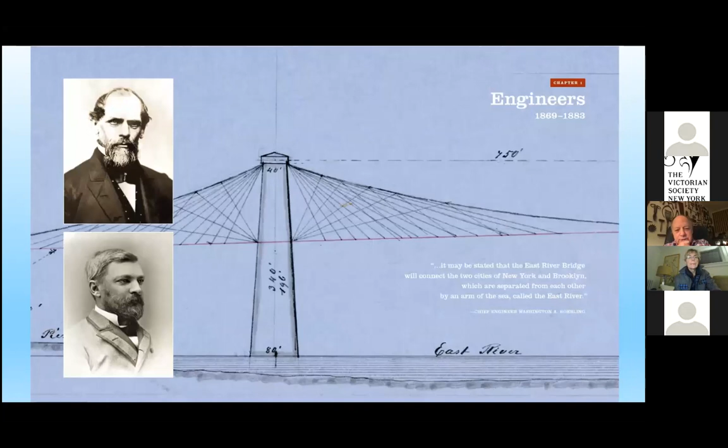So we will now track those chapters. Here we are with the engineers, the two chief engineers, John Roebling again and Washington Roebling, pictured here in an illustration of the time.

John A. Roebling was the chief engineer. He was the most successful and best known of the suspension bridge builders in America in the 19th century. He had trained in Germany as an engineer, and had studied philosophy with Hegel, who by one account described John Roebling as his favorite student.

But John Roebling decided after his family had lived in Mulhausen, Saxony, Germany for generations, that Germany was no longer for him, that America was the land of opportunity. So he fled Germany with a group of others and declared himself a Pennsylvania farmer. He and his brother purchased thousands of acres in Western Pennsylvania, not far from Pittsburgh. He farmed for about a year, then decided it was not sufficiently stimulating for him and abandoned farming—he had never farmed before arriving in Pennsylvania—and became a surveyor, then wrote a publication from Europe about wire rope and became a wire rope manufacturer in this tiny little town in Western Pennsylvania.

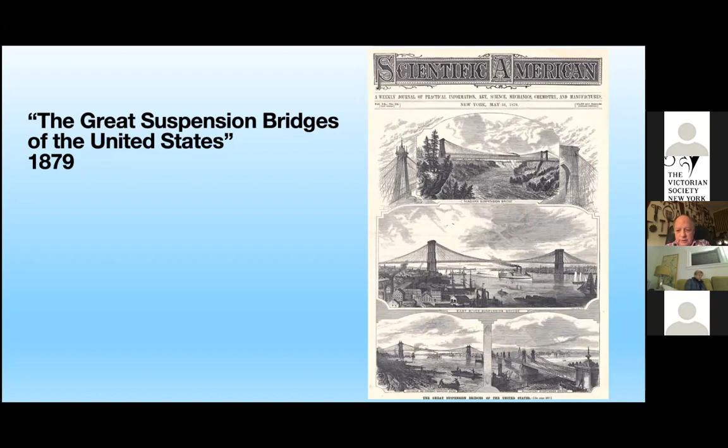So here we are, the Niagara Bridge, one of the first great constructions of the Roeblings. Both John Roebling designed this and Washington Roebling worked on it. Constructed between 1851 and 1855, across the Niagara Gorge, which one can easily imagine how difficult it was otherwise to get across reliably. You see that this was, in fact, a 2-tiered bridge.

So there are 4 cables here, 1, 2, 3, 4, holding up this bridge on stone piers. You see the truss element, which was a key Roebling quality, giving stiffness to the bridge so that it would not start to vibrate with wind or with any kind of rhythmic movement.

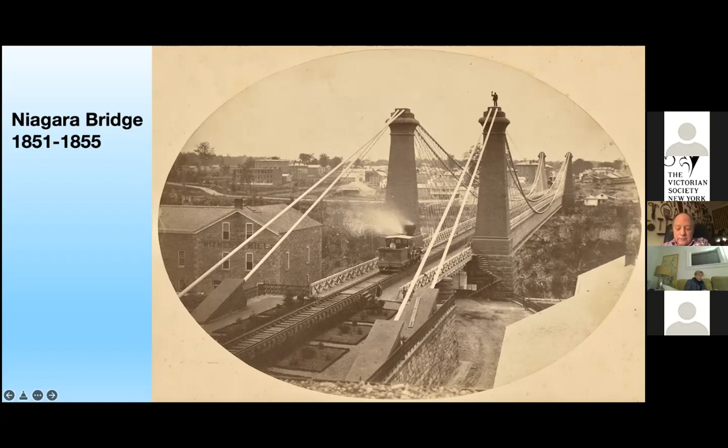Then there was a second tier, a second level underneath for carriages. So the top tier was for steam locomotives to pull railways across.

And so here we're getting close to our 3D images. This is a stereoscopic view, which were tremendously popular during the Victorian era, starting in the late 1850s.

Running into about 1920 was the period for these views. They were slightly different side-by-side photographs on a heavy paper card that was about 3.5 inches by about 7 inches.

The Victorians could travel the world with these stereoscopic views, seen with a special dedicated viewer with two lenses: Paris in 3D, or Egypt in 3D, or London, just going around the world. This was very much the home entertainment center for the Victorian parlor.

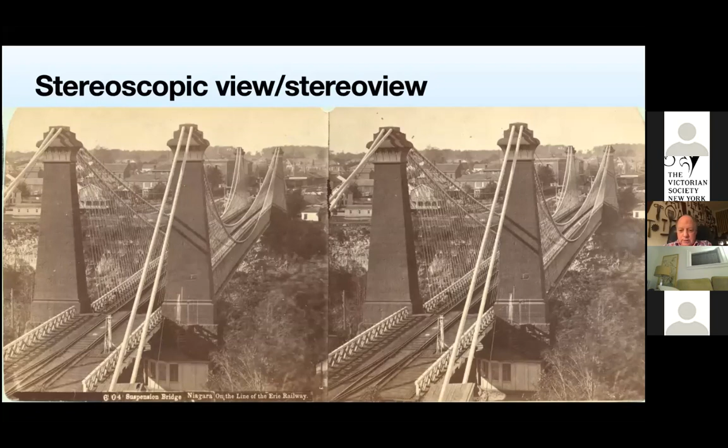This shows you the side-by-side images. And then here is an anaglyph, which is a scan that, with software available for free on the internet, is turned into an image which can be viewed with 3D glasses.

Now if you do have the 3D glasses, put them on with the red lens on the left over your left eye and the cyan lens over your right. Then adjust, get about 16 to 18 inches away, and move your head a little bit, your eyes, and you should be able to see in 3D the Niagara Bridge.

We have about 15 images in 3D that we will go through, most of which are of the Brooklyn Bridge. I'd like to thank Jeremy for conscientiously getting these glasses out to all of you.

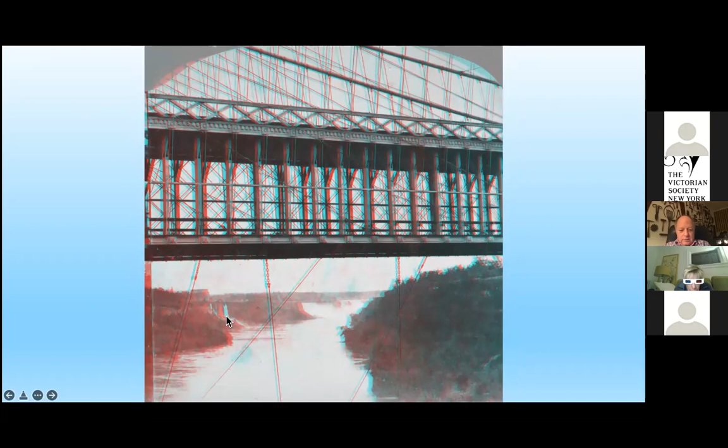Here is another 3D view, so glasses on for that: the bridge looking towards the Falls of Niagara in the distance. You see the American Falls here and the Canadian Falls here, and you get a good view of the carriage crossing underneath that top area where the railway went across. This was actually the first bridge in the world that allowed railways to go across like this.

So here we are, a subsequent bridge by the Roeblings: the Allegheny Bridge in Pittsburgh, 1857 to 1859. And then the Cincinnati-Covington Bridge, 1856 to 1866, with construction shut down during the Civil War.

But for many people, this is kind of a mini view of the Brooklyn Bridge, and you see some of the fundamental aspects that would appear later in the Brooklyn Bridge. This is a substantially reduced version of the Brooklyn Bridge.

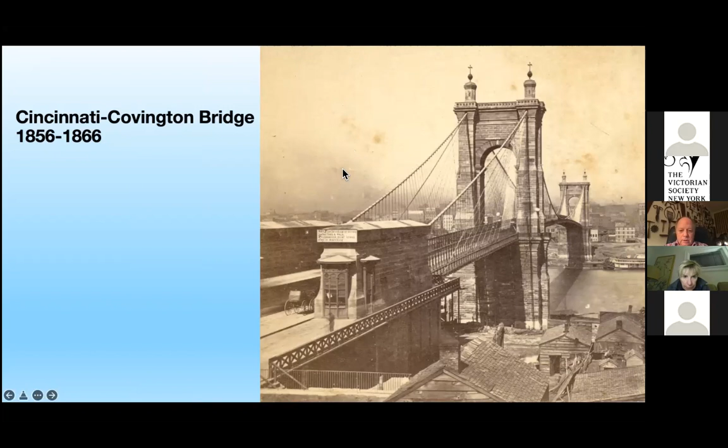Currier and Ives print of the Brooklyn Bridge, which gives us a good opportunity to describe exactly what a suspension bridge is. First, you need to keep the ship traffic on the East River going, particularly because the Brooklyn Navy Yard is to the north of the bridge, and ships from the United States Navy had to get underneath. So the towers serve that function by lifting up the deck of the bridge to allow passage underneath.

Then you have the cables. In the circumstance of the Brooklyn Bridge, four cables, one, two, three, four, which support the deck and the weight of carriages, or cars, or bicycles, depending on the era that you are in.

And so from the cables hang these vertical suspenders, up and down, and then they are attached to the steel beams of the Brooklyn Bridge.

The Brooklyn Bridge was the first bridge in America, or well, the first bridge to use steel as opposed to iron in its construction. John Roebling very much believed that steel was the material of the future, and in fact we know that steel cage buildings made possible Manhattan rising late in the 19th and early in the 20th century.

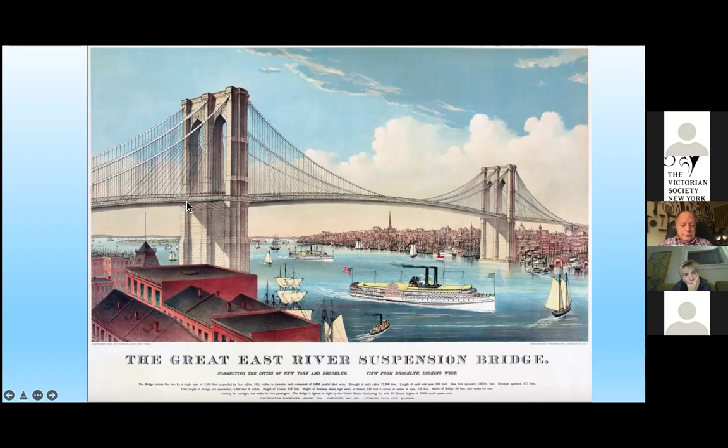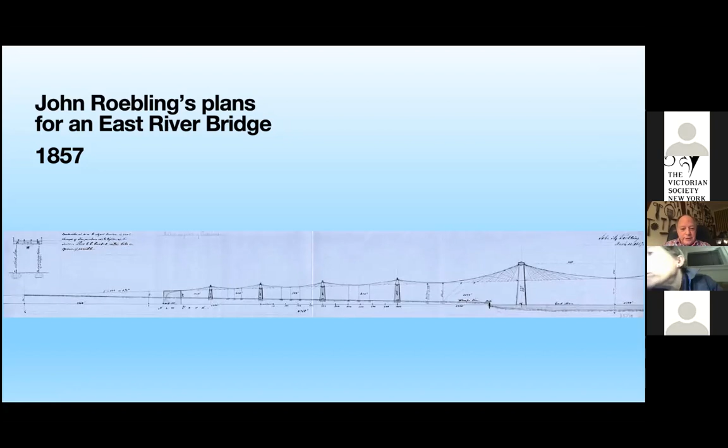As early as 1857, John Roebling had submitted plans. He and his son had been stuck on one of those ferries amid the ice floes in the East River. John Roebling was not a patient man, and he very much wanted to get something across the East River to allow for crossing. This was a plan that was to go up around Roosevelt Island, up around where the 59th Street Bridge stands today.

Here we are: this is the ferry slip on the Brooklyn side at Fulton Street. You see the mansard-roofed terminal that actually opened during the construction of the Brooklyn Bridge. At the far left you see the tower on the Brooklyn side, and then you see these ferry slips. This is in fact where John Roebling, the father, was mortally wounded, as in June of 1869, he and his son were down there surveying for the center line of the bridge.

So this is the Hamilton Avenue ferry I photographed, which shows you what these pilings looked like at the side of the ferry slips.

John Roebling was up in this area of the Fulton Ferry landing, and a ferry was coming in. He stood to the side, or at least he thought he stood far enough to the side, but his leg was crushed between the ferry and the wooden pilings, and he died a very painful death of lockjaw just several weeks later.

He believed in hydrotherapy and treated his wound with water, which did not work. So the ferry, ironically, killed off the man who had planned to build this bridge that would eventually kill off the ferries. This is his grave in Trenton, New Jersey.

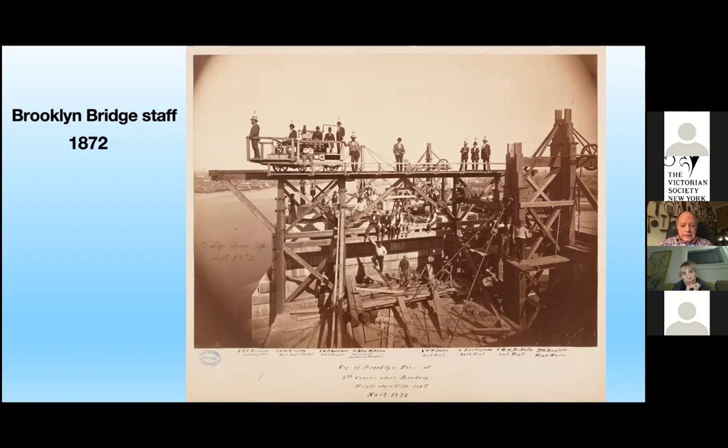Here's a wonderful photograph of the staff in 1872 on the Brooklyn Tower. What's great about this is that it's all keyed. It's difficult when you have a photograph and no one is identified, but here all of these individuals are identified.

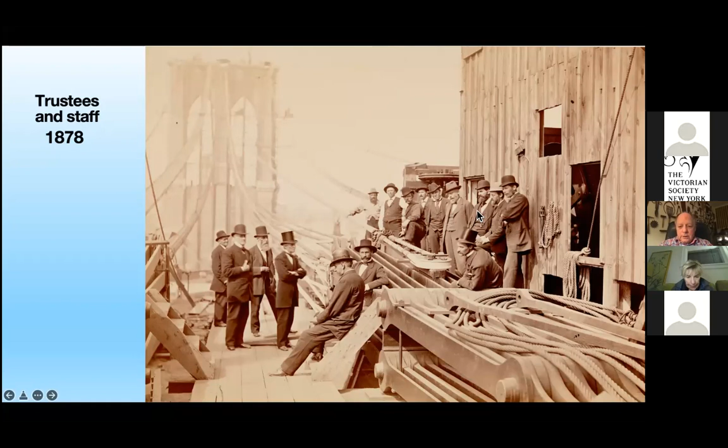With the draftsmen and supervisors here, some of the assistant engineers here also, and two of the assistant engineers in the foreground, both of whom are interred at Greenwood Cemetery, where I'm the historian. This is William Paine at the left here, and this is George McNulty at the right.

Six assistant engineers, one of whom was hired on a 30-day contract early in the construction, all of whom worked the entire 14 years and stayed until the bridge opened. Really quite remarkable.

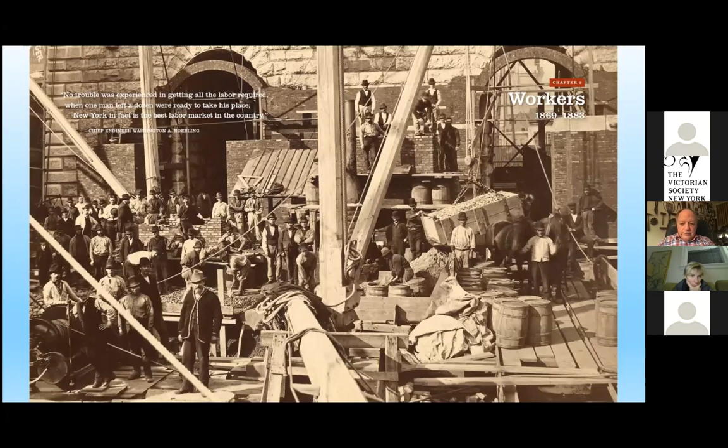So the workers—here is a really remarkable photograph of the workers gathered for this photographer, and a detail of that. You can actually see the faces of the men who built the bridge. Several thousand worked on the bridge.

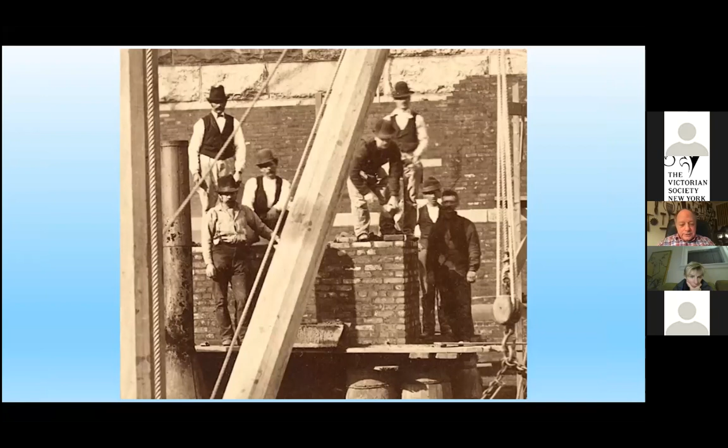At any given time in a week, 100, particularly when the caissons were being used, were quitting out of about 300 who were working. So there was a tremendous turnover, but never a shortage of men who wanted to work on the bridge—primarily German, Italian, Irish immigrants, also veterans of the Civil War just 4 years after the war had ended, and also a number of sailors who felt comfortable at heights.

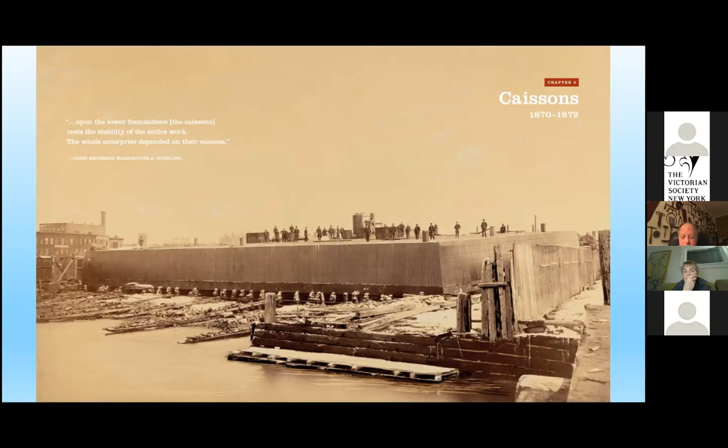This thing was massive, as you can see from the size of the men atop it. It was 168 feet long by 102 feet wide. David McCullough calculated you could fit 4 tennis courts on top of these caissons. There were 2 caissons, one for the foundation of the Brooklyn Tower and one for the New York Tower.

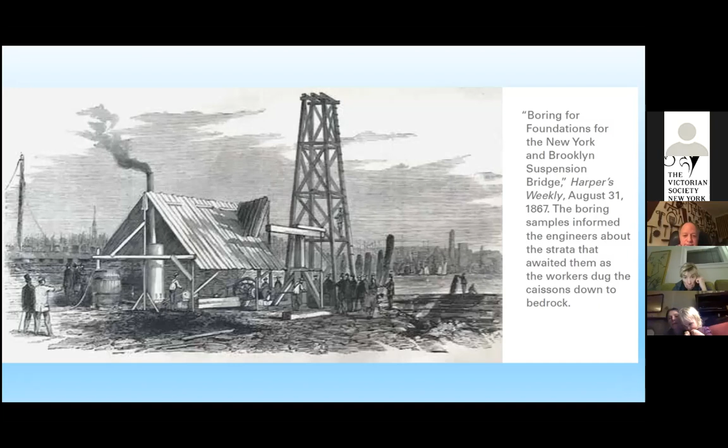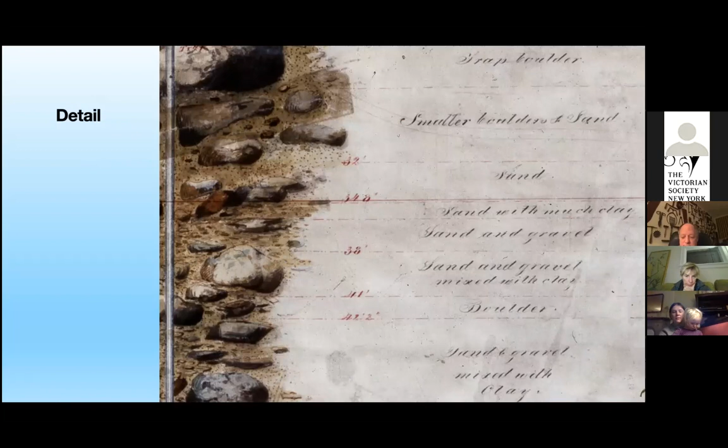Of course, if you were going to dig these huge boxes into the ground - and they became the largest things ever dug into the ground in the history of humankind up until then - you needed to get some idea of what you were going to encounter. So here we are in 1867, taking borings to figure out what stratification they would encounter. Here's a drawing from the municipal archives, and here is a detail showing the boring area at left, and some of what they were going to encounter as they went down: a layer of sand with much clay, sand and gravel, et cetera.

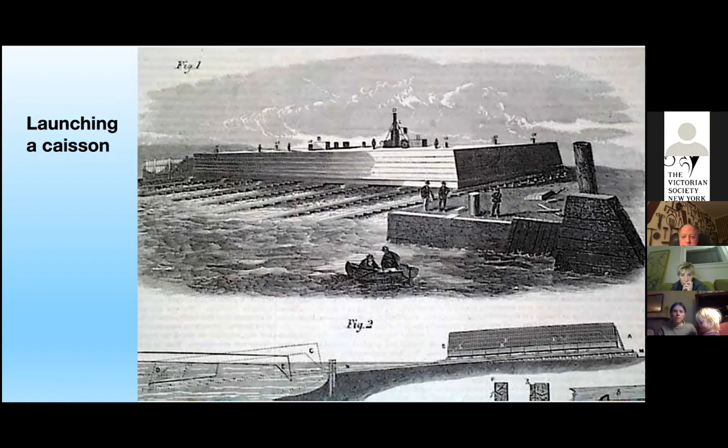Other engineers told Washington Roebling that this thing was going to go right to the bottom of the East River as soon as it was launched. You can see it here as it would be proceeding down, and then it would level itself - it went exactly as he had planned.

This is a man who built some of the largest ships on the sea, and his proudest accomplishment was one of the caissons of the Brooklyn Bridge.

So this is a caisson, how it operated. This is a woodcut drawing that would have been in one of the illustrated newspapers - I think this one was in Harper's Weekly. Of course, there was Frank Leslie and others.

What you're seeing here is the digging space where the men worked, removing boulders and sand and clay and mud. There were 2 scoops, and these scoops came down through what was essentially a barometer that was holding the compressed air inside the chamber. These scoops could come down through the water, scoop up the debris from a pool down below, and pull it up and out of the caisson.

And then these are the entryways for the men. There was an airlock up in here, and then a supply shaft, and also an air shaft for the compressed air.

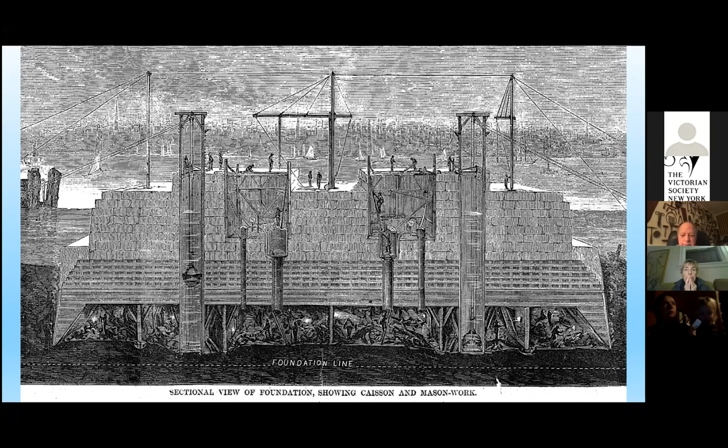So you see how they're piling - here's the wood of the caisson, and here are the stones that would make up the tower. They are piling these blocks one at a time, helping to stabilize the caisson, and at the same time hopefully driving it down a bit into the ground. They were going to dig on the Brooklyn side about 50 feet, and on the New York side about 80 or 90 feet down with these huge wooden boxes, which are still there, I might add.

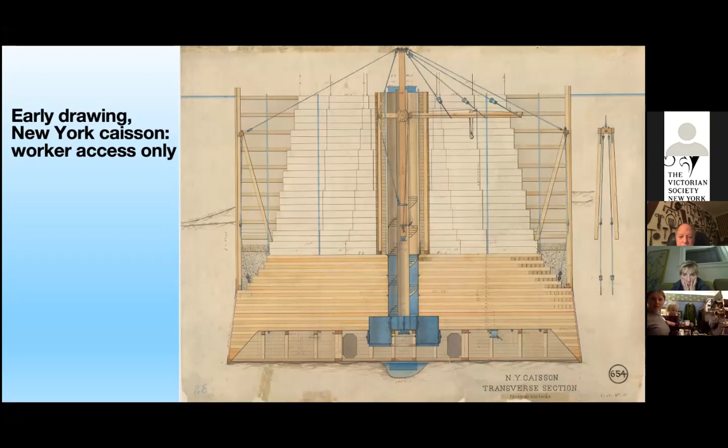So here's an early drawing, by John Roebling I believe, of what this was going to look like - again with the caisson below, the wood of the caisson, and then the stone of the tower rising up above.

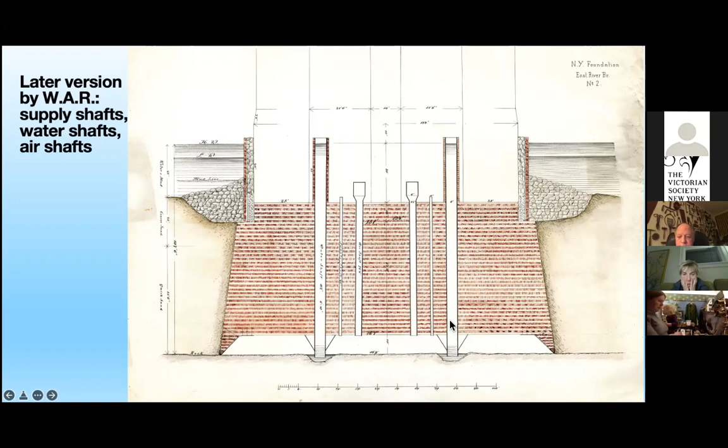Here's a more sophisticated drawing by Washington Roebling showing the various shafts, with the water pool below where they'd dump debris and pull it out with clamshell buckets. This is the foundation of the New York Tower, 1872. We can usually tell the Manhattan side from the Brooklyn side because Brooklyn was first and more advanced. Here you see the Brooklyn Tower rising above, while the Manhattan Tower in the foreground hasn't reached that height yet.

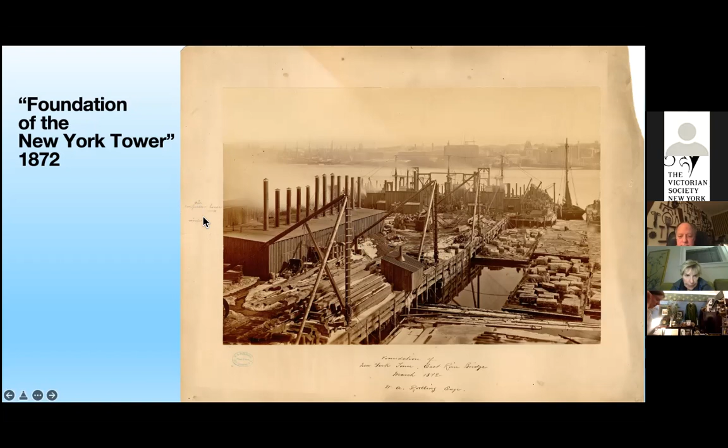You also see snow here, so we know this is winter. And you see this building with some sort of notation. Looking more closely, it says 'air compressor house' - these were the engines that compressed air to be pumped into the caisson to keep the East River's water at bay. It also says 'winter' here, which we've confirmed from the snow.

Erica Wagner, who wrote the biography of Washington Roebling and is an expert on all things Roebling, assures me that this handwriting is by Washington.

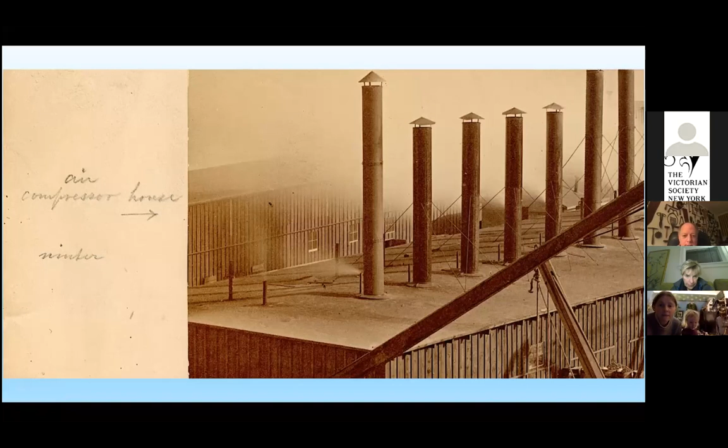So here we are in the airlock, with a woodcut from 1869 through 1883, until about 1890 I think. Mass-produced newspapers could not mass-produce photographs, so they had a process of morphing photographs or drawings into woodcuts carved into wooden blocks to reproduce them.

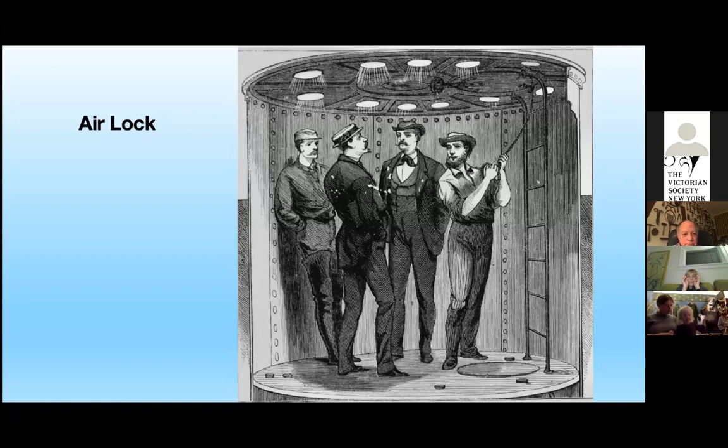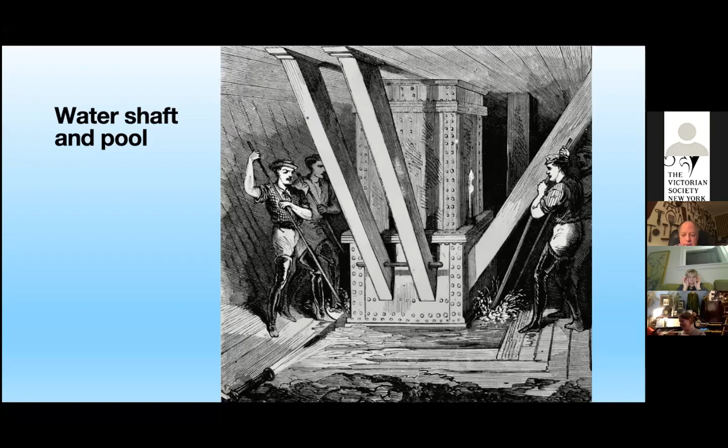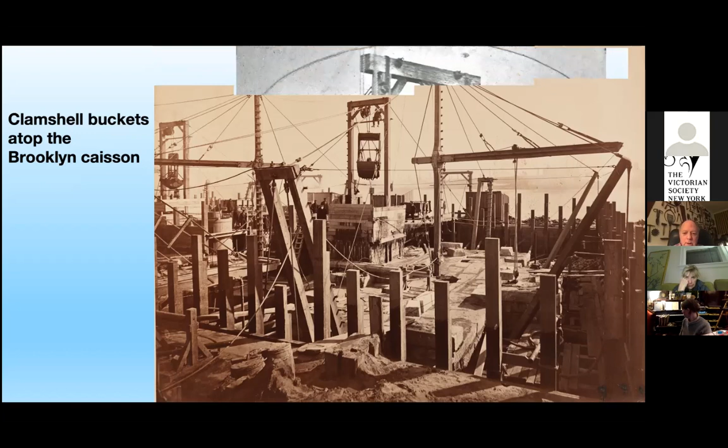Here's a better look at the clamshell bucket - you can see they were dropping debris into cars. They were then rolling the cars to the edge of the caisson and dumping it into the East River, and then dredging it out of the river as necessary.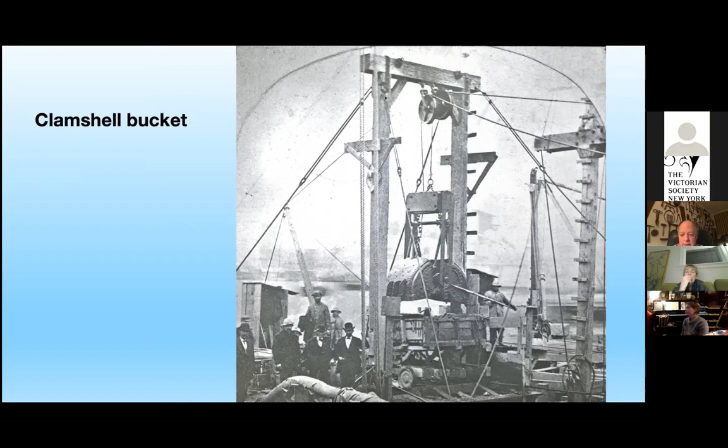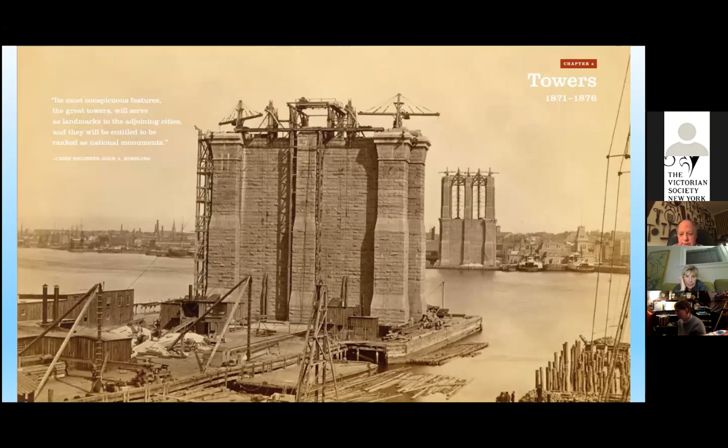Okay, now we're at the towers. These are what will hold up the bridge, the bridge deck, 135 feet above the water. Again, in this wonderful photograph, we're on the New York side and the Brooklyn Tower is rising in the distance.

One of John Roebling's drawings of the tower shows he was clearly influenced by his experience growing up in Mulhausen, which was surrounded by a stone wall, as was typical in Germany. And so he wanted this stone grand arched entrance to Brooklyn and to New York.

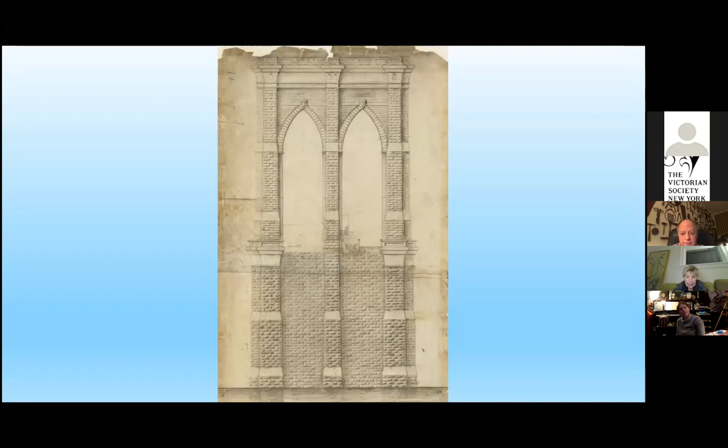This was really never repeated again after this. A reduced version of this had been done across the Ohio River in Cincinnati.

Here is a detail with an interesting little drawing of a woman with a parasol, apparently just a detail that the draftsman could not resist.

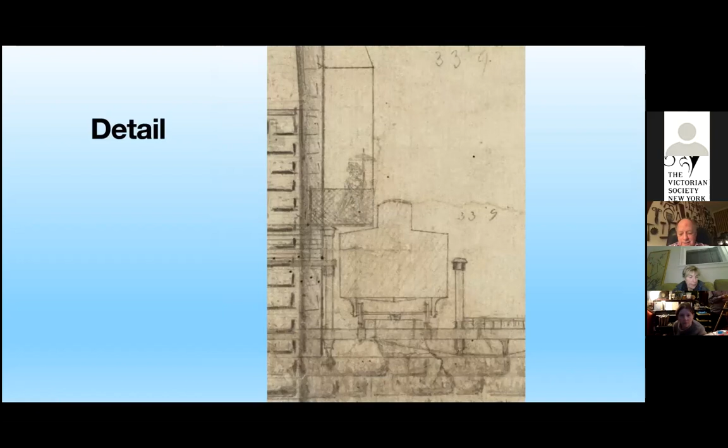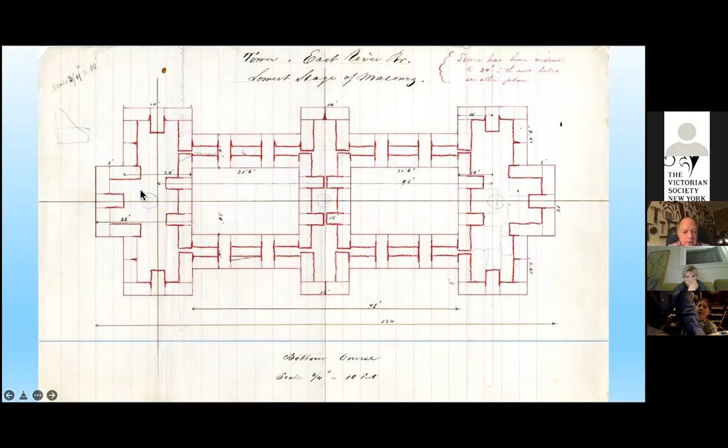So here we are, a drawing by Washington Roebling of one of the towers. Each of these stones was custom cut. But you see here also something important to understand, which is that the towers are hollow. So this is a hollow area, this is a hollow area, hollow. Based on his calculations, it was not necessary to put stone in there, and you could save on construction costs by not putting stone there.

So here we are, the tower rising. We're on the New York side again, because you can see the Brooklyn Tower in the distance. A wonderful photograph with these stones hanging here. I think this photographer had very much of an in with the bridge company.

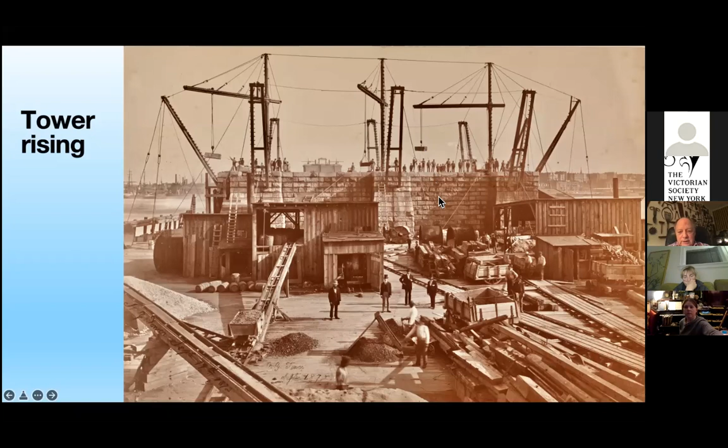And so here again, we have some wonderful photographs of the bridge in 3D. If you put your glasses on, you should be able to see this sailing ship coming across with Manhattan behind it.

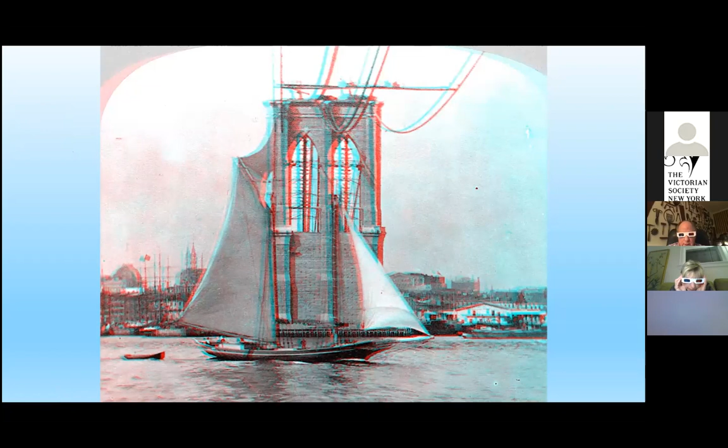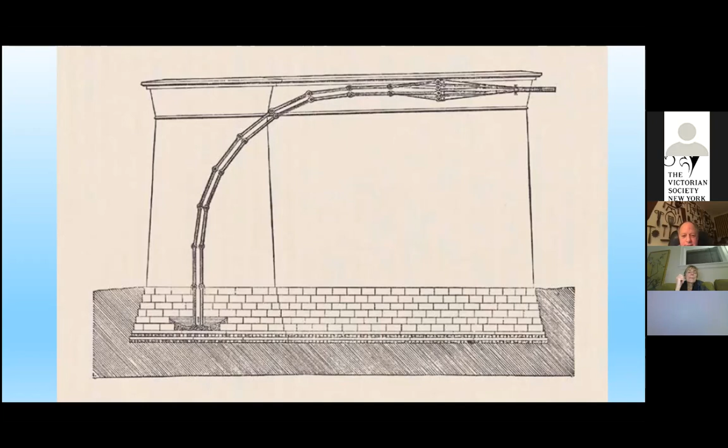This gives you a perspective. Here is the anchorage on the Manhattan side and the Manhattan Tower. And the cables are going to hang down this way and then go into the anchorage where they will be tied down.

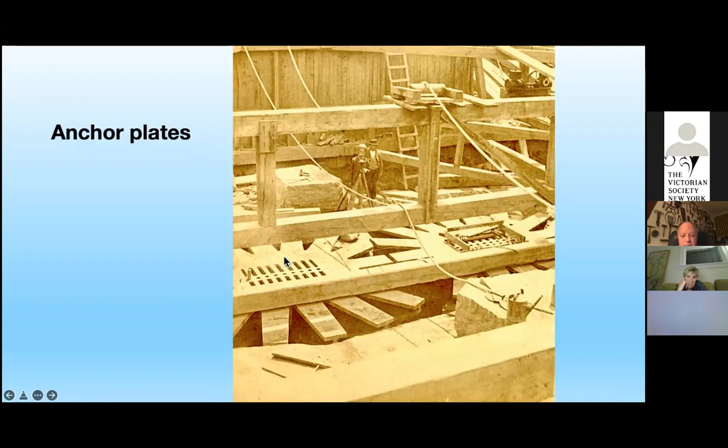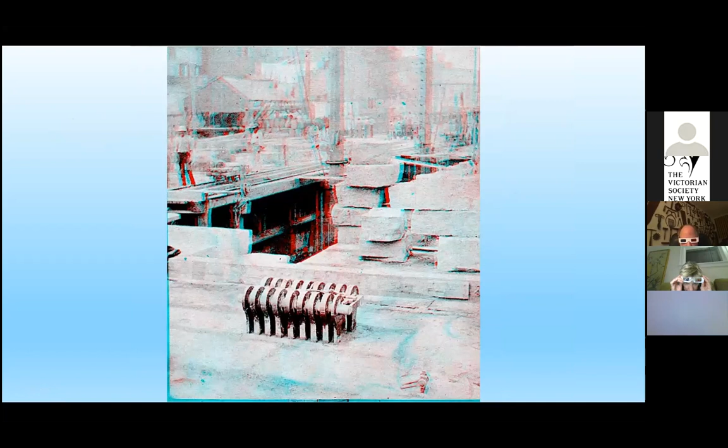So here are anchor plates, these large kind of starfished cast iron pieces. And then this again is in 3D, so with glasses on you should be able to see the 3D effect on that. And then we go to the bars of the anchor chain, and then in 3D with your glasses on.

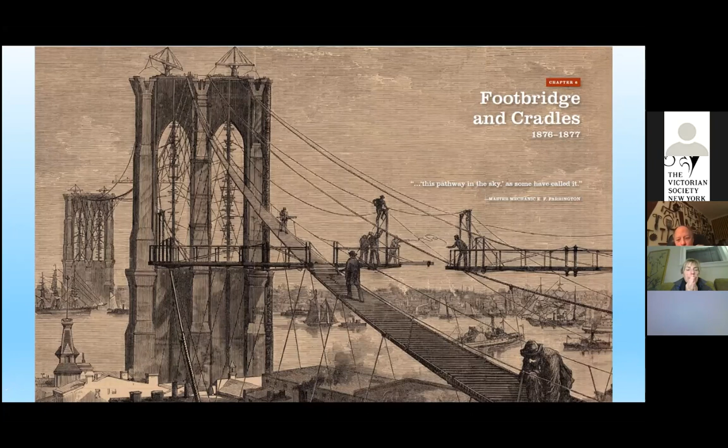And now we go to the footbridge and cradles. The idea of the footbridge was to build this temporary construction of oak slats that would allow the men to get out on these cradles, to reach them, and to monitor the cables as they were being spun. In France, they were building cables and then lifting them up onto the towers, but that was a problem because the tension on the wires was uneven and not good engineering-wise. So here, what they did was create the cables in place one wire at a time by pulling them across. And so you see those cradles here between the towers.

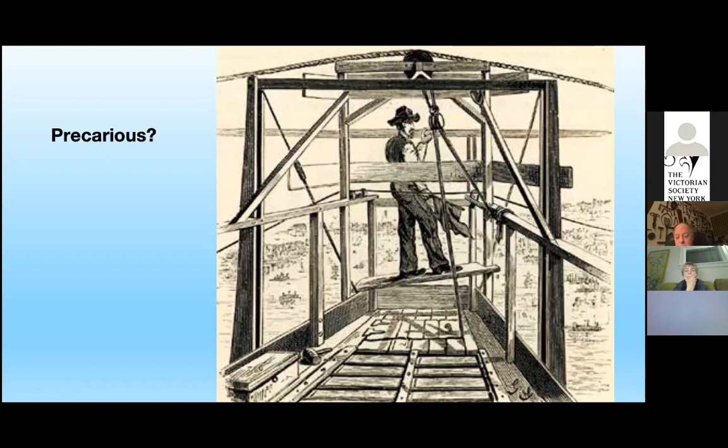You can see the wood in the foreground moving with you, and you're looking down towards the footbridge. So here we are, a woodcut of one of the workers monitoring the cable, the parallel wires as they're being spun. He's got a flag in his right hand, and he's supposed to signal if one of the wires is not taut enough or too taut.

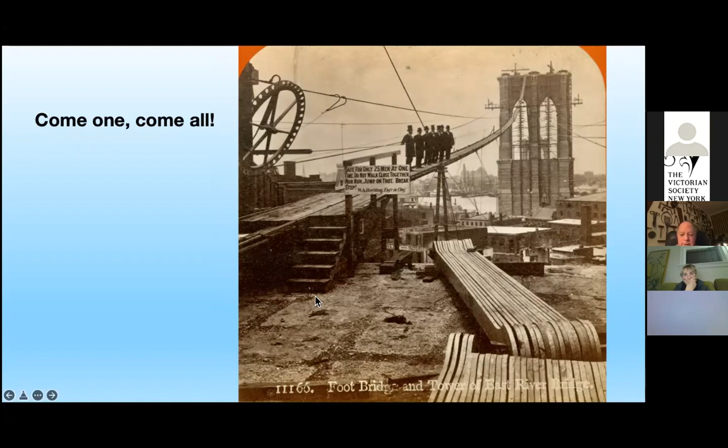Here we are, come one, come all. There's a sign there, but what you don't see at this entrance to the footbridge is a gate or a security guard or anything else. So you could climb up a stairway to get onto the anchorage, and then walk across the footbridge on your own.

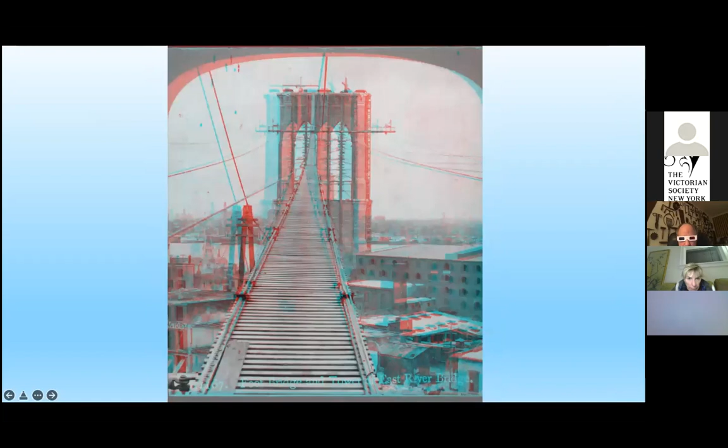Here we are, another 3D image looking up the footbridge. These slats were spaced to allow the wind to get through them, so the gyration of the footbridge would be somewhat limited.

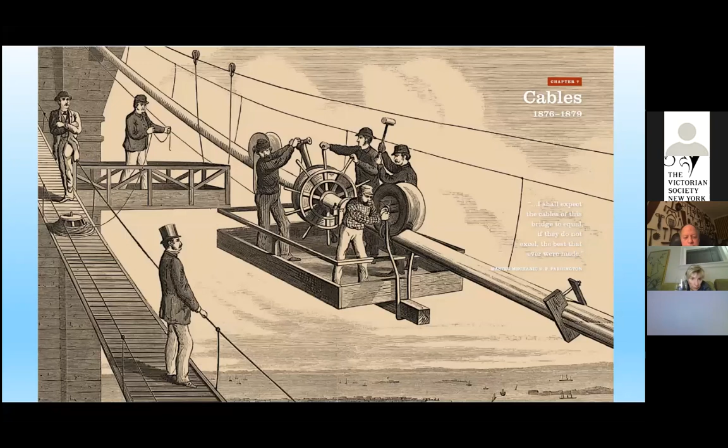So here we are, the cables of the bridge. This is part of the wrapping procedure. First they had to create the cables. They ran a wire across, pulled it by ship, then pulled it up onto the top of the tower, creating a loop. That loop was then driven by a steam engine.

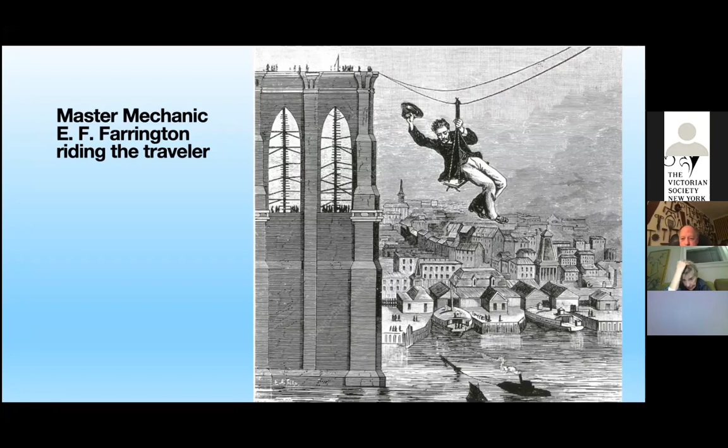This is E.F. Farrington, the master mechanic, demonstrating to his workers that it was safe to be up on the wires at this height. This gives you an idea very similar to a clothesline.

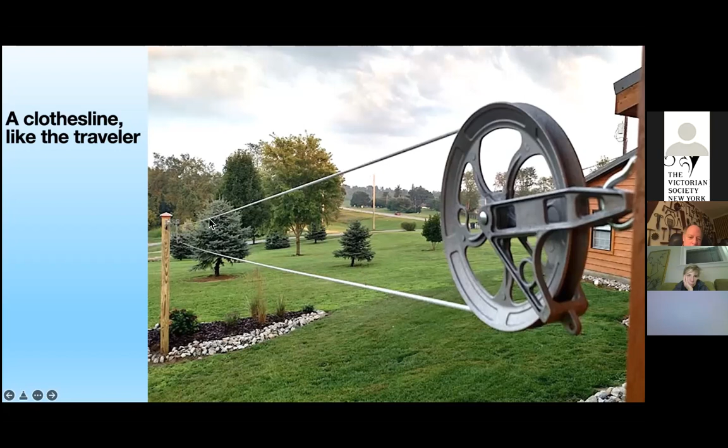You would attach a wire to it and pull it across from the Brooklyn side to the New York side, and then do it again. Pulling with this carrier wheel, you see these two wires looped around to be pulled across. They had to do a lot of wire splicing.

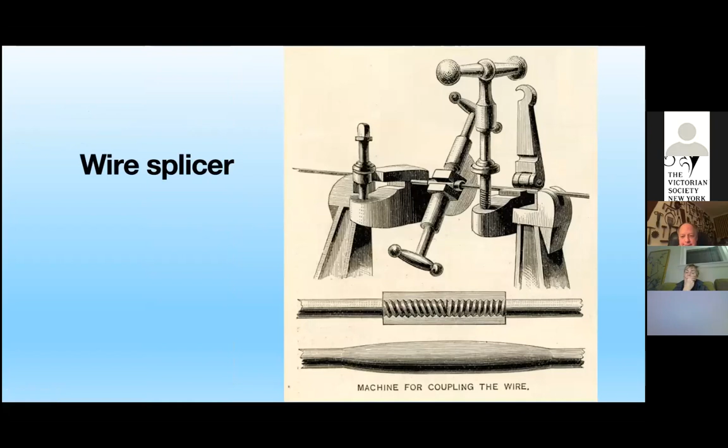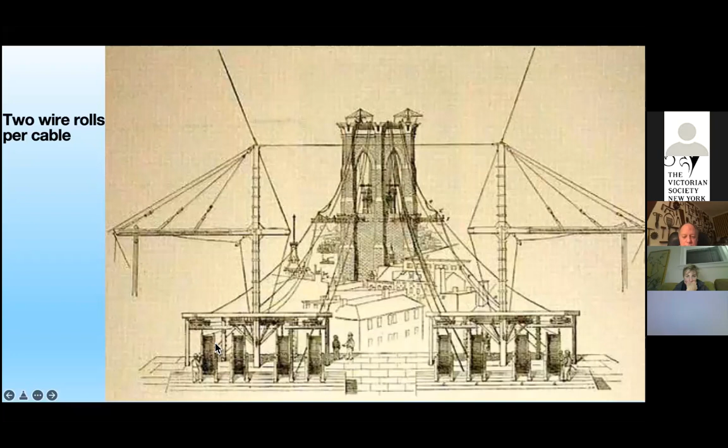This is just a wonderful, elegant woodcut of that technique. Here's the wire shed atop the Brooklyn anchorage. And looking down again, there were two huge wheels of wire attached, dedicated to each of the four cables.

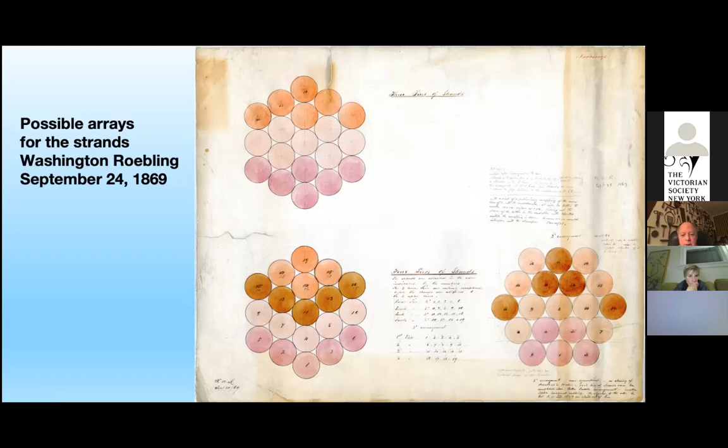Here's Washington Roebling playing around with the idea of how to arrange these. He had never built a bridge, and I don't think a bridge had been built in America that had this many strands and wires. So he was trying to figure out how you would array them. As you can see, he is changing his mind up in here—14 will become 16, etc.

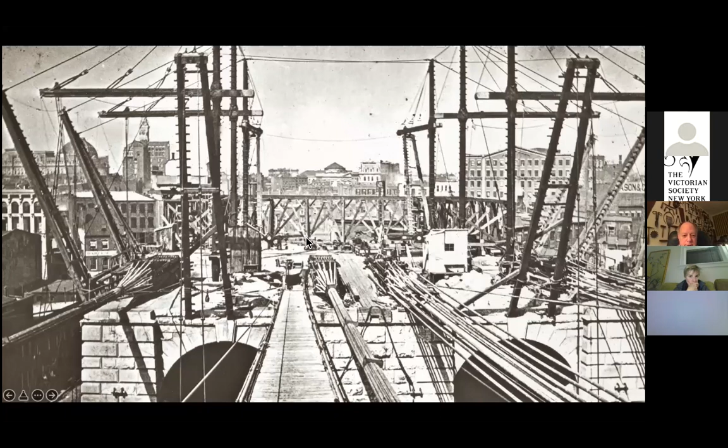This is one of my favorite photographs of the bridge construction, from my own collection of lantern slides, which are very Victorian, also showing the 4 cables. Here is one cable that has been bracketed, the strands. Here is a second one bracketed. Here's a third one with the strands visible and not clamped down. And here's the 4th cable, also not clamped down.

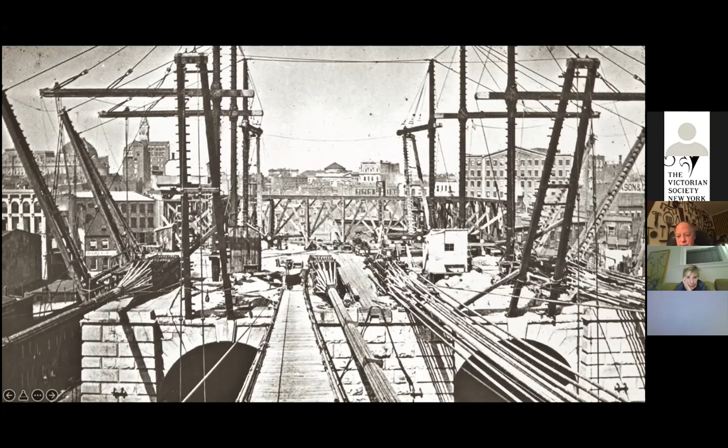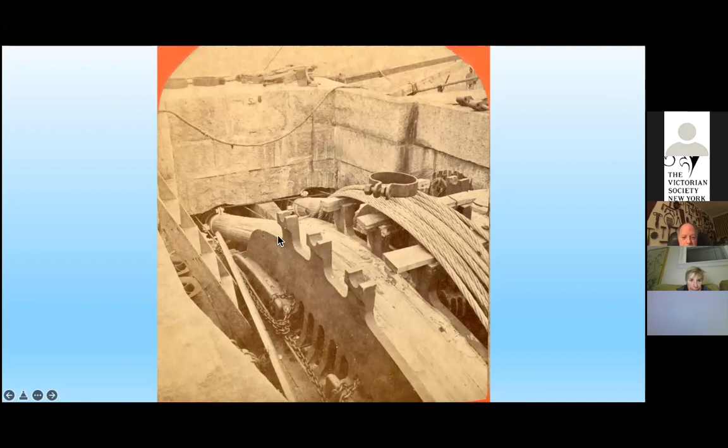And so we're looking at Manhattan. City Hall would have been right around here. This is the top of the tower, showing both a cable here, which is parallel wires, and these twisted wires, which are the diagonal stays coming off the tower.

And here's another great 3D image, so glasses on for that. You see one of those brackets up in here that they're using, and here's one in use down here.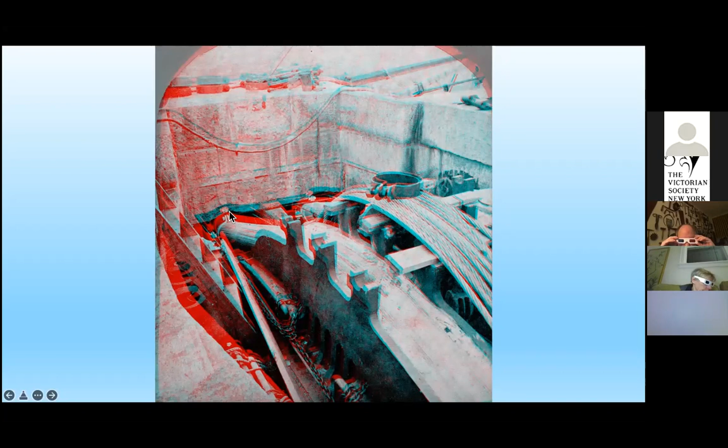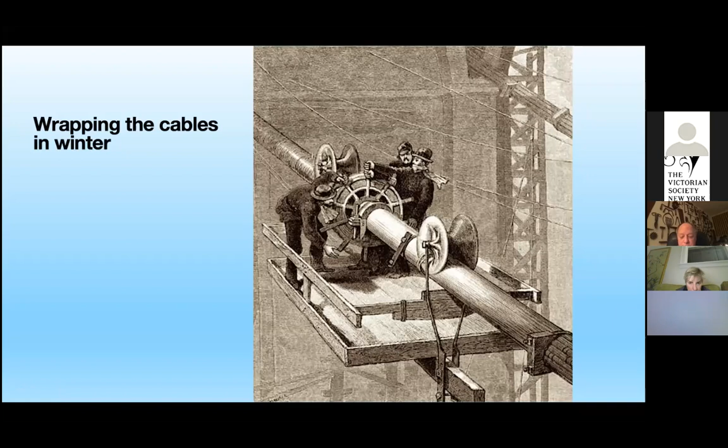For the compression of the cables, wrapping the cables in winter, they carried this on. They wrapped the cables with galvanized zinc wire. Here you see they're going around this way, whereas these wires are parallel—these are the wires of the cable. This did a great deal to protect the wires, and so the original cables are still in place on the Brooklyn Bridge.

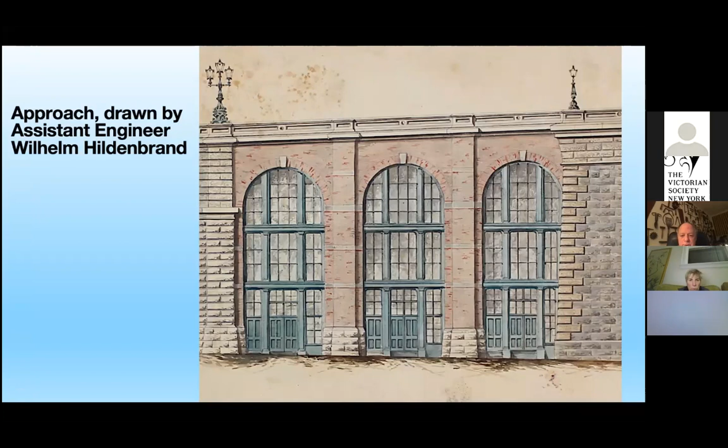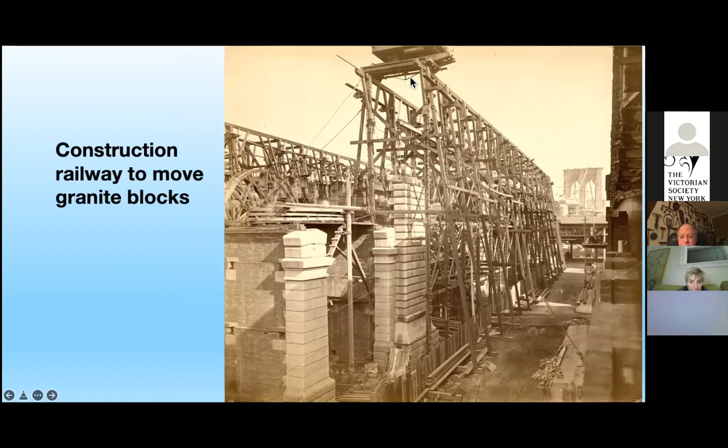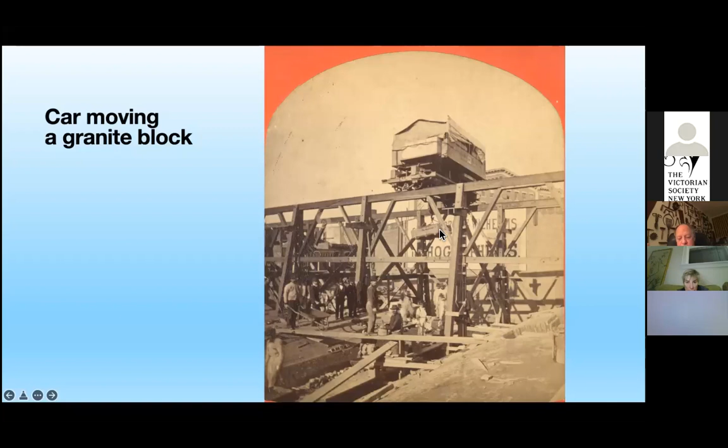So here we are at construction. They're building this wooden railway, temporary, to allow them to move materials around. You can just barely see one of the railroad cars at the top here. And here is a better look at it, and here is one of them in operation with a payload underneath so they could transport a stone over here or materials over there.

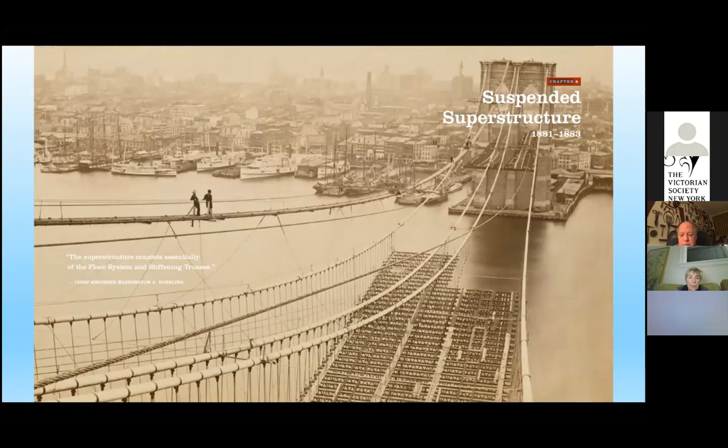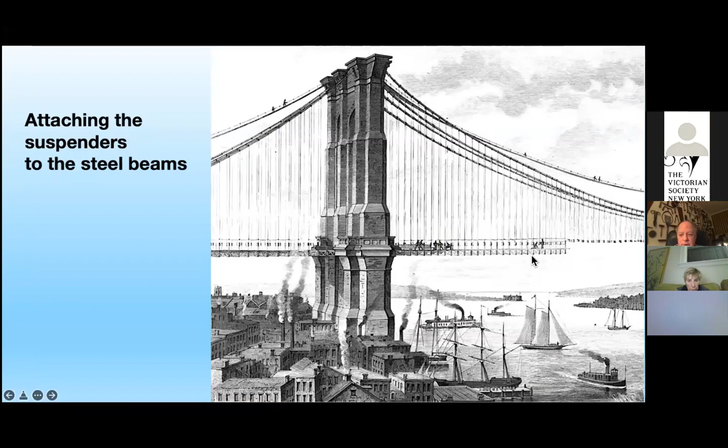Here we are, the suspended superstructure. That's the deck of the bridge. You see the steel beams here, 85 feet across. John Roebling was thrilled to know his bridge would be as wide as Broadway, 80 feet, and it ultimately had to be expanded by Washington Roebling to 85 feet. Here we see the suspenders hanging off the cables, supported by the cables attached to the beams, and they're laying these beams out. Here's a better look and a woodcut of the beams as they're attached to the suspenders.

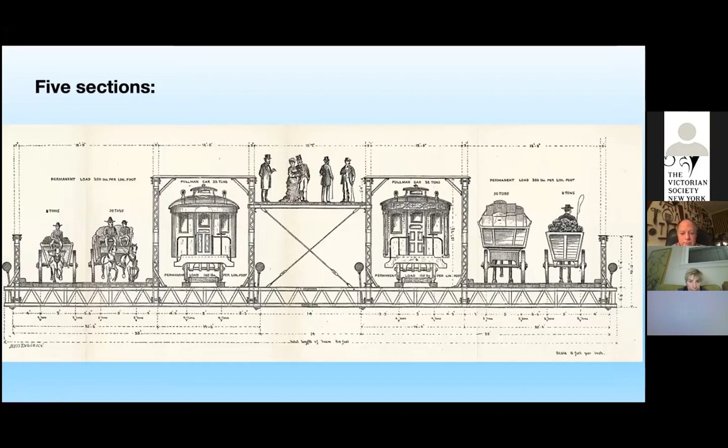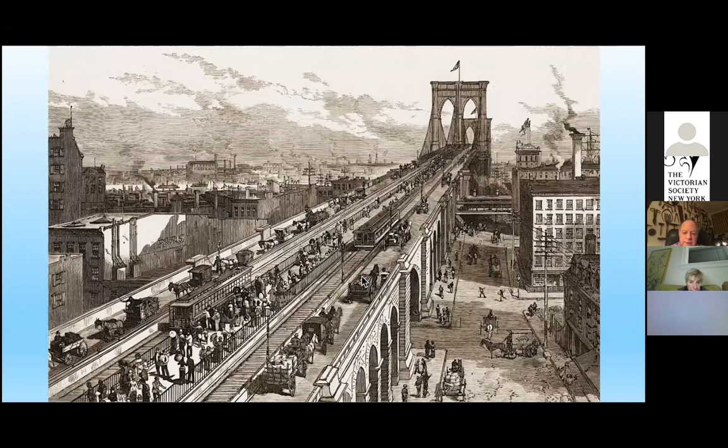And these are the sections of the bridge. The bridge really pioneered the idea of an elevated pedestrian promenade, which I think was one of the most brilliant aspects of the bridge. So you had that for pedestrians, then mass transit, a cable railway across the bridge, and then two lanes for carriages or livestock crossing the bridge. Here we get some sense of that in this woodcut. One problem with woodcuts, though, is that they tend to be fanciful at times, so you're only seeing one lane here where there should be two.

Here are the railways and terminals. The railway didn't open until September of 1883, about four months after the bridge itself opened. The idea was to offer mass transit from Brooklyn to Manhattan. William Paine, one of the assistant engineers, was an expert on cable cars. He had worked in San Francisco and would work in Denver and Cleveland on their cable cars. This is the steam engine in Brooklyn that drove the cable cars, 5 cents for a 5-minute ride from one end of the bridge to the other.

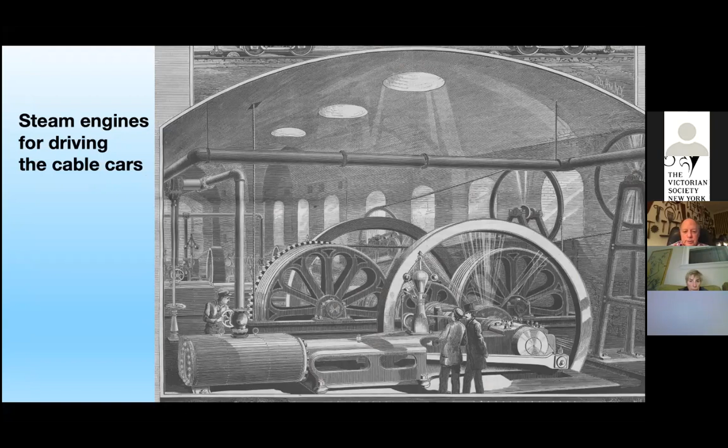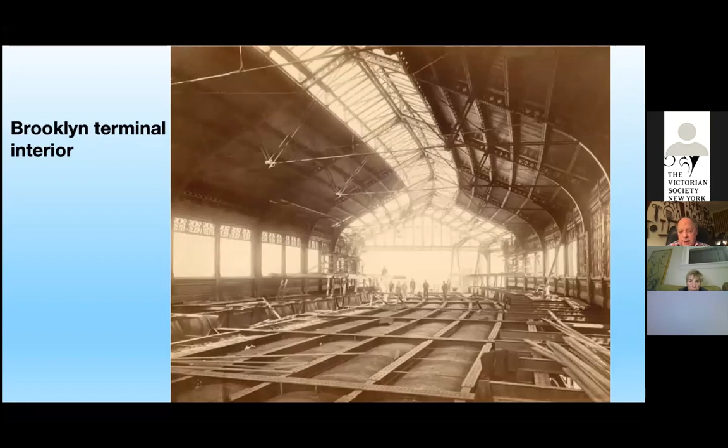These are the terminals here on the Brooklyn side, some of the wonderful detailing, municipal archives, and the Brooklyn terminal almost finished. Here we are inside the terminal. So they had three tracks, three sets of tracks.

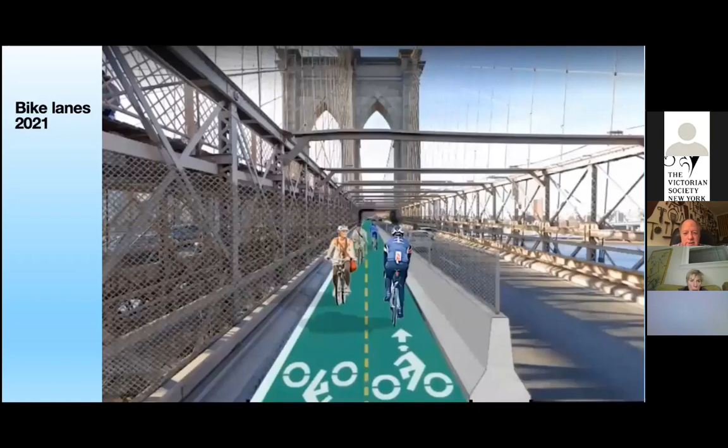And then, of course, this is the latest development, September of last year, a bike lane on the bridge. So cars ascendant circa 1950, bicycles ascendant circa 2021. For me, what's wonderful is that the pedestrian promenade has been restored to its original concept of pedestrians only, with the bike lanes created down here.